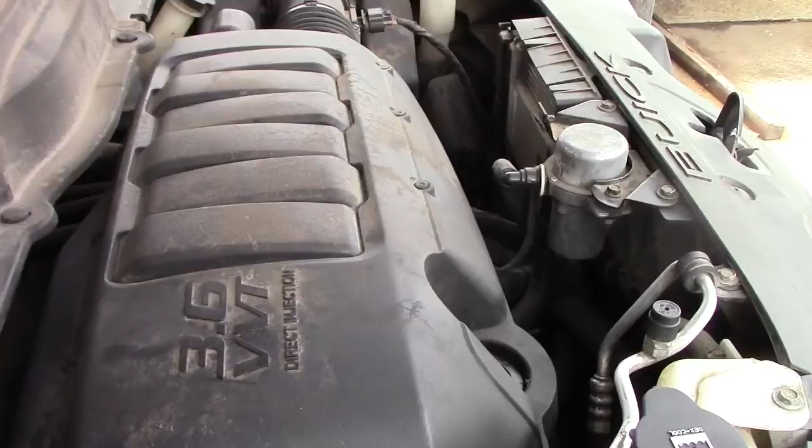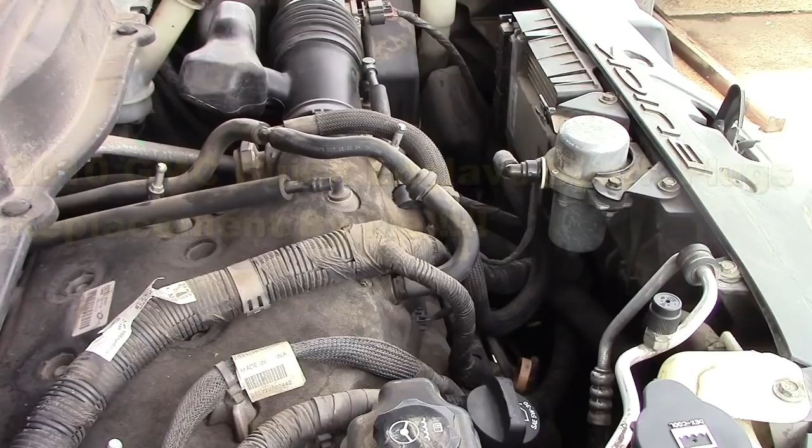So I'm doing the spark plug replacement on my 2010 GMC Buick Enclave. I just bought it three months ago, and I'm doing it to replace the spark plugs.

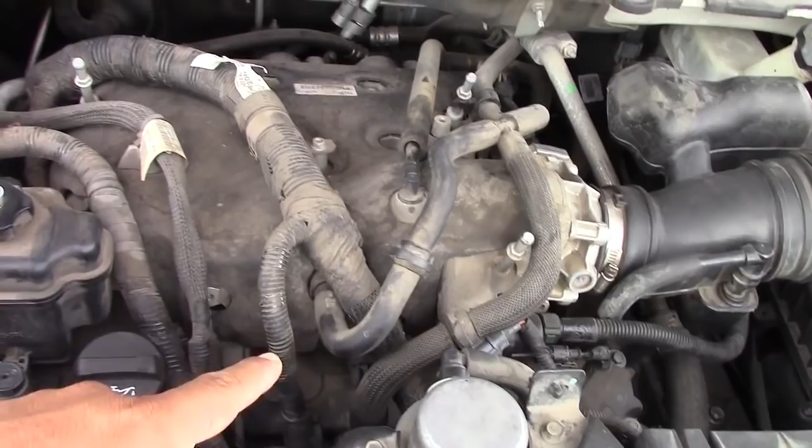It's easy to replace them. The only thing that's a little complicated is that you gotta take apart all the wires and remove them out of the way to access the intake manifold. You have to remove the manifold intake to get access to the spark plugs, because there's no way you can remove them the way they are right now.

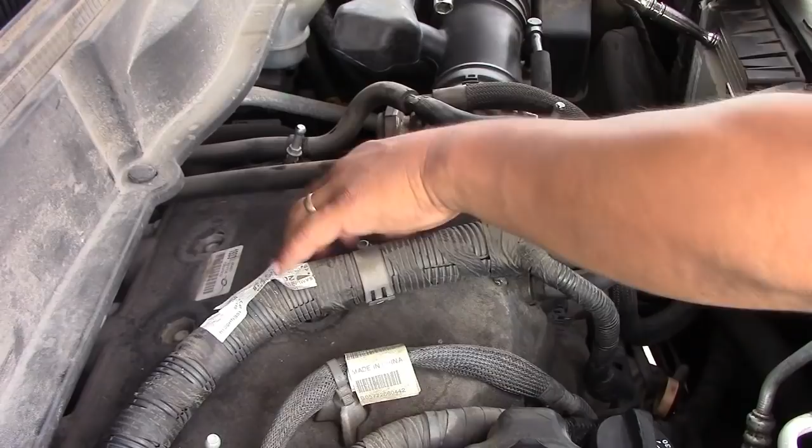Okay, so first you start with the 6 bolts on the upper intake manifold, on top. The last one is by the throttle body, that's the last bolt. So you use a 10 millimeter socket and remove all 6 bolts.

Then remove all the hoses and all the electrical wires. Just disconnect them and put them on the side. You don't have to do anything else with them, just like these hoses, you just remove them and put them out of the way.

That's pretty much it. All you gotta do is get access to remove this cover, but before that you have to remove these 2 big large bolts, they're just there to hold the top.

I think it's 10 millimeters as well, but it wouldn't work, so I just used a wrench to do it. Pull it up like this, and now we can see it.

Now I'm just gonna clean it and get rid of all the dust, because I don't want any dust in the spark plug holes. So just clean it a little bit. After that, I'm gonna take the air filter housing off, and clean that as well.

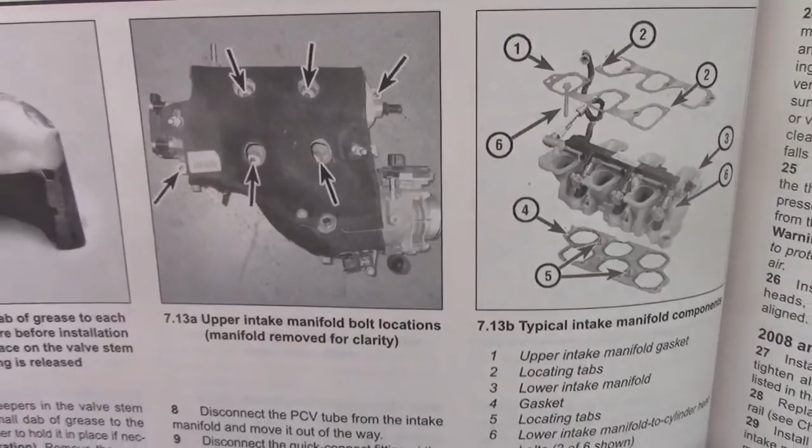After that, I'm just gonna remove the 6 bolts of the upper intake manifold, like this. Here's the manual showing how to do it and where the bolts are located: 1, 2, 3, 4, 5, 6 of them. I'm just following all the instructions from the manual.

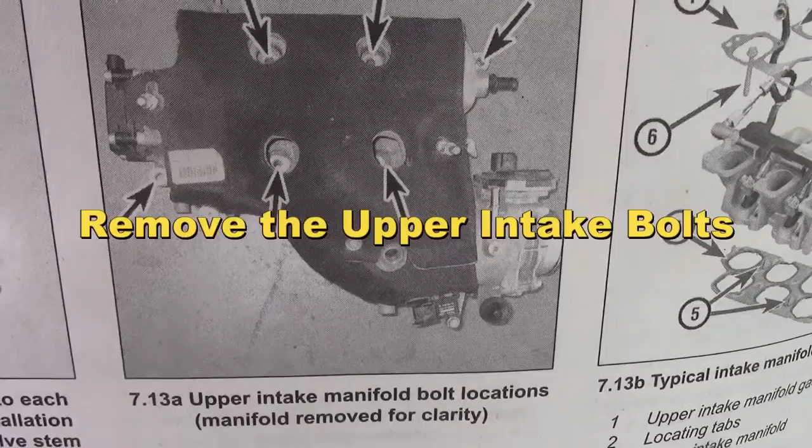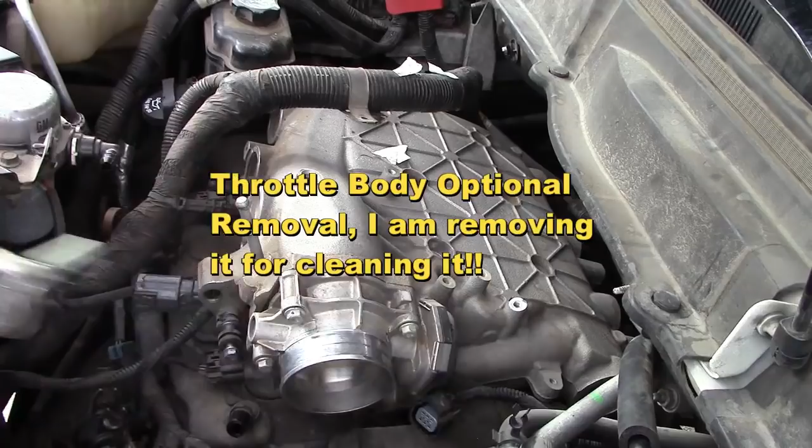I'm not really a professional, I'm just doing my own car, I don't do this for a living. I like to do it myself, stuff like this, to save some money, since the shops around here in Texas, the mechanics sometimes try to charge you a lot of money for it, which is their job, of course. I just started making videos doing the kind of stuff I'm doing on my own property. This is my car, not someone else's, and I'm not a mechanic.

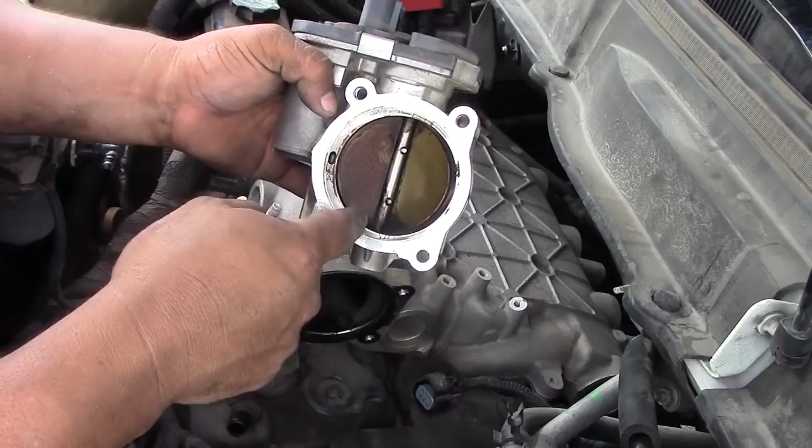I just follow the manuals, and then I'm removing the throttle body. You don't have to, but since it's pretty dirty, as you can see even inside there, I will clean it up.

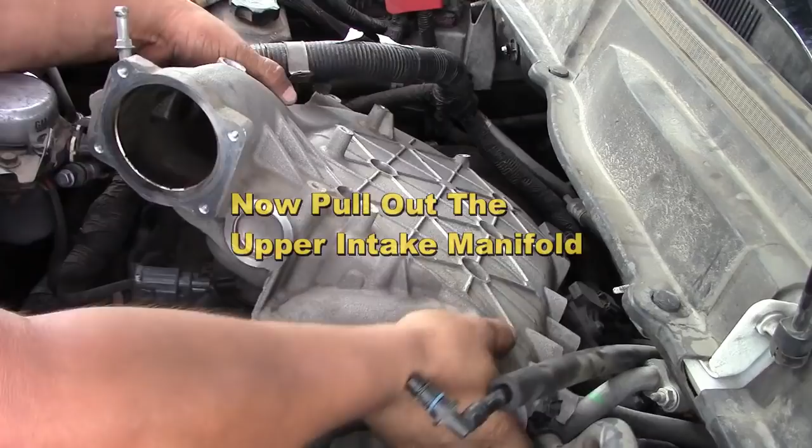You can use the same gasket. Oh, this is the last bolt I was talking about, there you go, it's kind of hiding here, but this is it. Now I remove the upper intake manifold like that, and then you'll see the brown gasket.

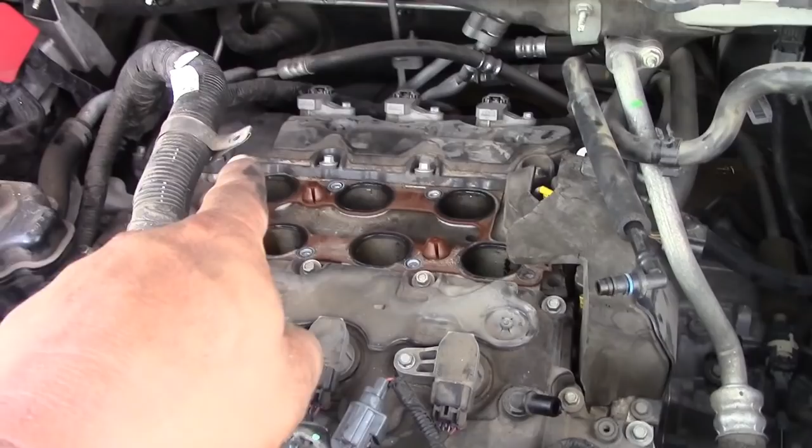They don't have it in stock, so I'm just putting the same one back together, and you put some paper towels over the holes for protection.

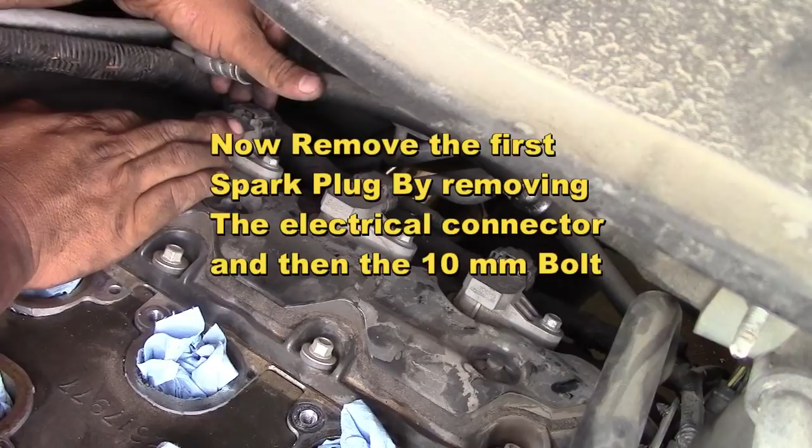I'm going to start with the spark plugs in the back, the rear ones, because it's easier to start there before finishing the front ones.

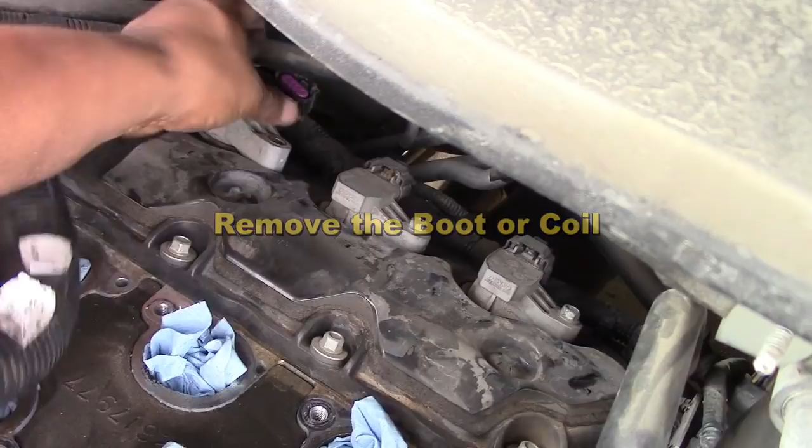It's pretty simple, basic spark plugs. You just remove the coil or the boots, whatever you call it. Like I said, I'm not a professional. Disconnect the electrical connector as well, and just try to turn it like this. There you go.

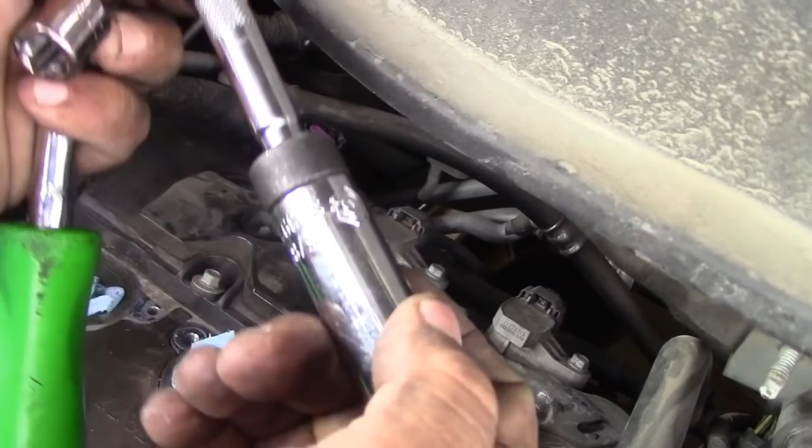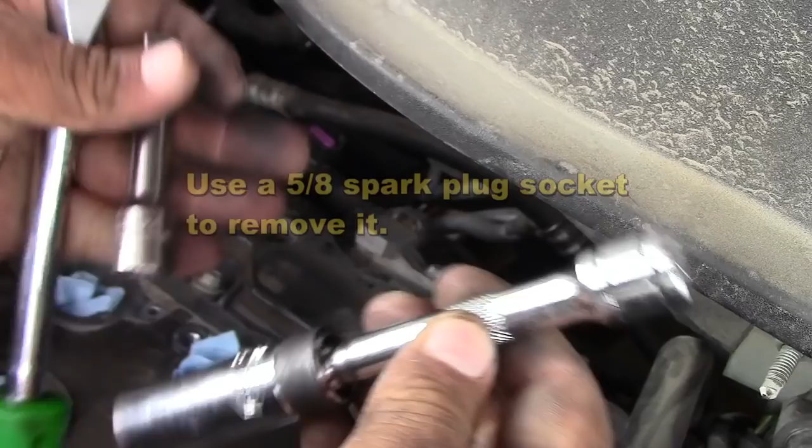You just check if it's in good condition. Sometimes they're cracked, damaged, or broken, so you replace them. But since all these are in pretty good shape, I'm going to reuse the same ones. Use a 5/8 spark plug socket and a ratchet, and you're good to go.

It took me probably like an hour or so to do it. Since I'm filming the video it takes more time, and after that I've been doing a lot of other stuff to this car.

After you get the spark plug out, just use a magnet like this one to pull it out of the hole.

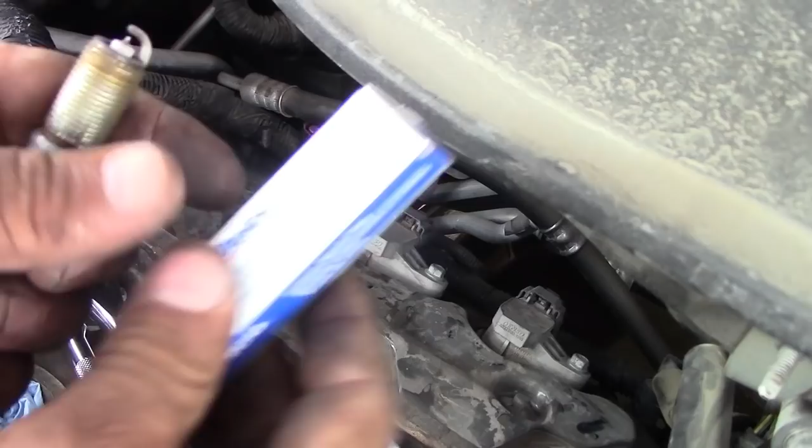As you can see, they weren't too bad. Well, that's my dog, but I always get the originals.

The, how do you say it, the part number is 41109 for the 2010 GMC Buick Enclave. I'm using the original OEM parts because that's always recommended by the dealer.

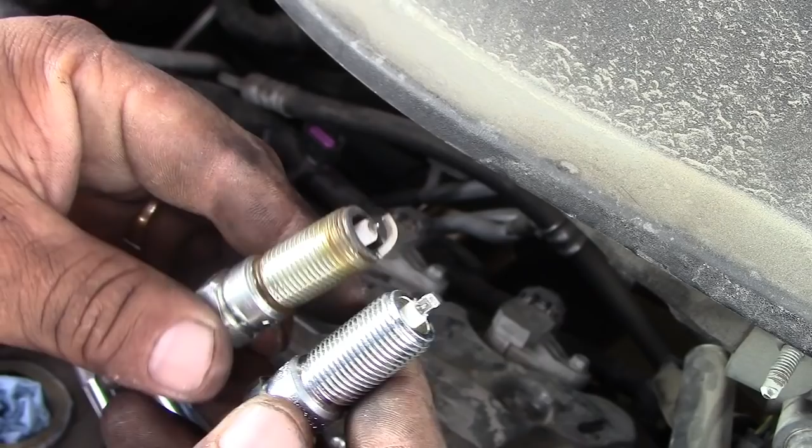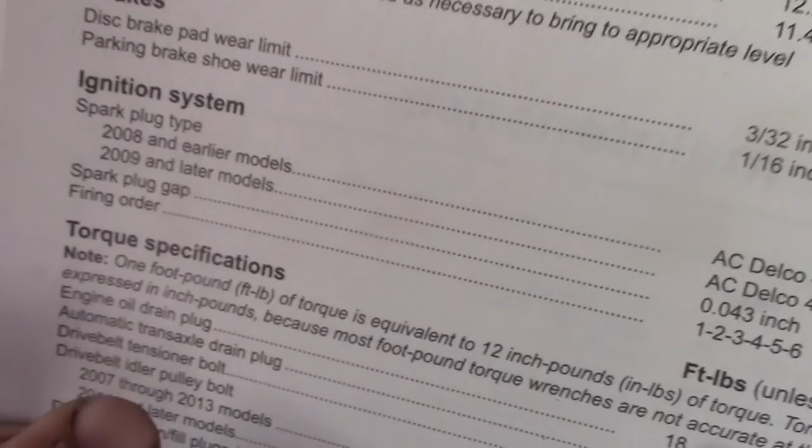For 2009 and later models, the gap, these are supposed to already be gapped, but it says 0.043 inch. So that's the calibration to gap this spark plug.

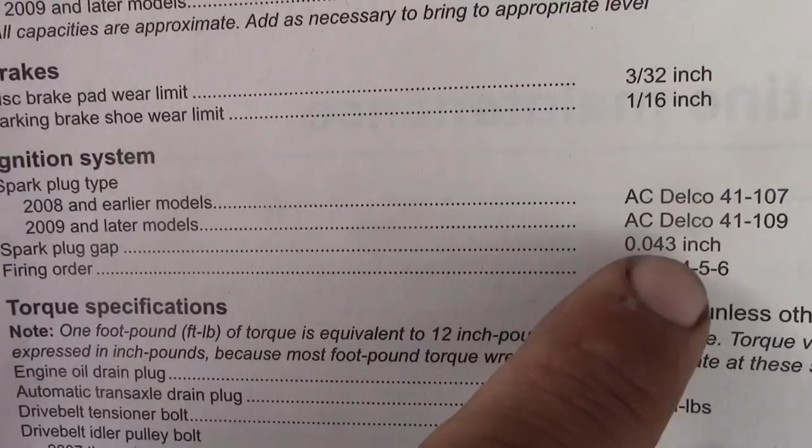Alright, so just doing it that way and you're good to go. If you want to double-check them, go ahead, but since I bought them, they say they're already calibrated.

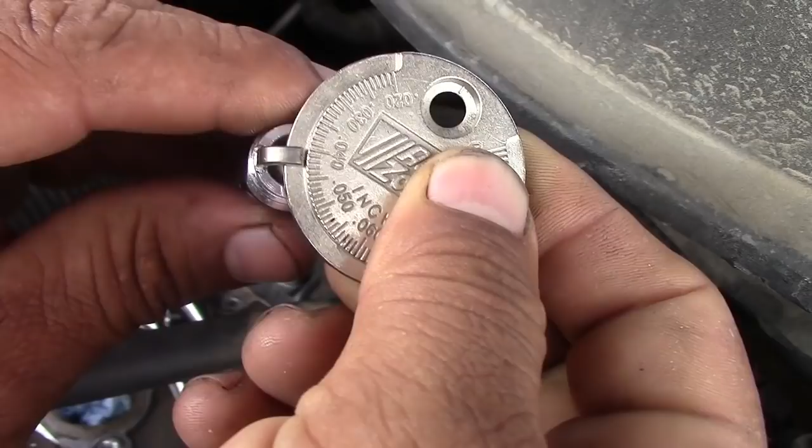They had a little plastic tube on top, which means they're already calibrated. They're already gapped.

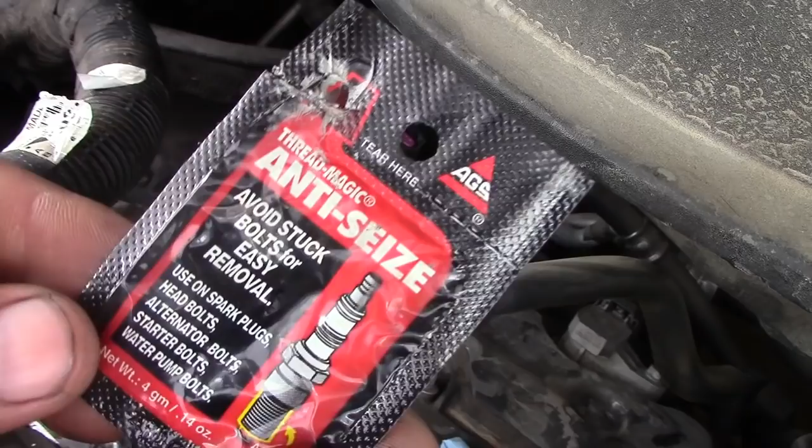And add the anti-seize to the thread. It's always recommended by the factory, just like this. Just put a little bit, you don't have to put a lot, and you're good to go.

I'm sorry, I can't put any... I'll put some music over this part. Just use a little hose to put it back in there, because if you use the socket it will fall or sometimes it won't work. So this is the best way to do it.

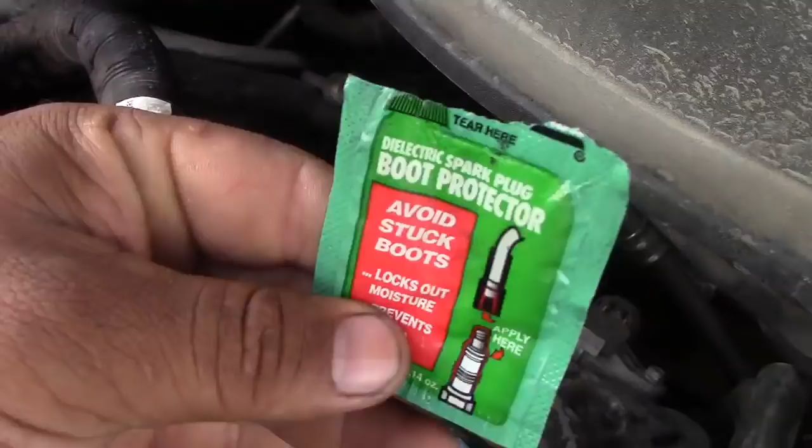So everything else is pretty simple, guys. I just wanted to share the video. I saw another video like this, and it was good, but not as clear as this one, so I tried to do a little bit better than that other video.

Just put some dielectric grease on the electrical connections, also on the boots, and you're good to go.